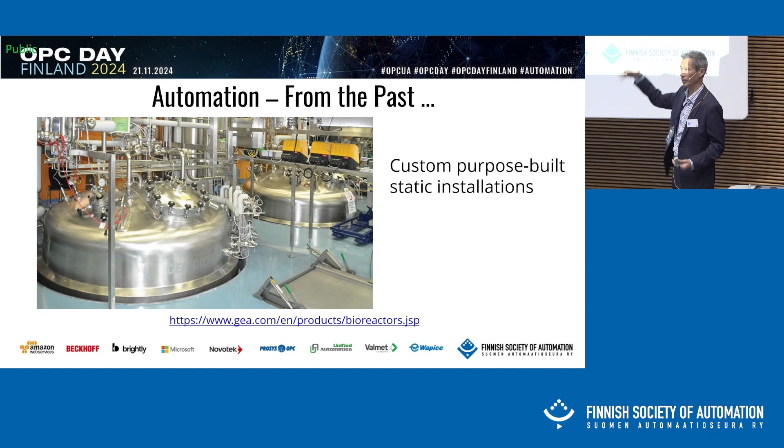So where I left off, we talked about the pharmaceutical manufacturing from 25 years ago, and you can see examples of very big stainless steel tanks. And this was the age of the pill, a pill for every person on the planet. So very big volumes, stainless steel tanks, one plant, one product. And so that's what it looked like.

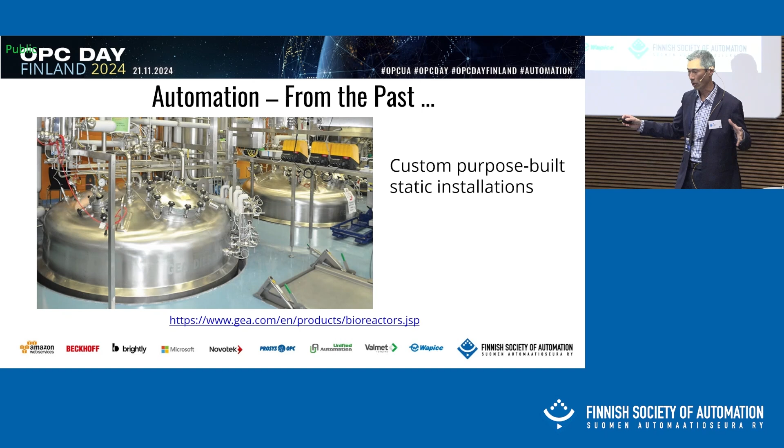But as I spoke about before lunch, the changing nature of the medicines, moving towards smaller patient populations, smaller batches, eventually, single personalized medicine, one medicine tailored to the individual. So the whole trend in the industry is much smaller batches. So our new plants look more like this. Single unit operations, so each piece of equipment performs an operation like a bioreactor, like filtration, like viral inactivation, chromatography. You can get these skids, you could have them in place with feet, but when they arrive, they typically come with wheels. And so they're also mobile modular units that stitched together can do the manufacturing production, much smaller facility.

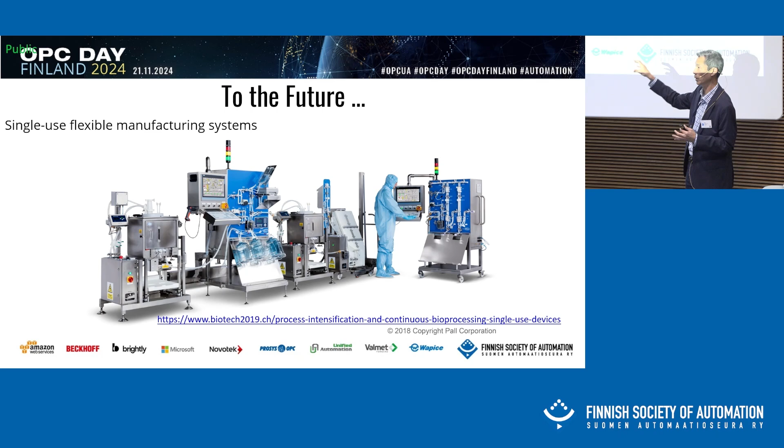You'll see the people are gowned. So if you have special requirements around making sure you have a clean environment, you want to minimize the space that you're treating with clean air and trying to keep particles out. And so the trend also is much smaller facilities with smaller equipment, and again, tailored towards a smaller patient population than in the past.

So what are the advantages of modular plant design? It's driven by business considerations that we're trying to transform. And I have a quote from our Vice President of Engineering, who has declared that all our future plants that we build, we want to spend 40% less capital, and we want 80% of all the engineering design work done off-site, preferably before we even decide to build the plants. So again, it's forcing us to use equipment that can be bought off the shelf, pre-manufactured by an equipment manufacturer. You'll hear names like Sartorius and Merck Millipore and Cytiva.

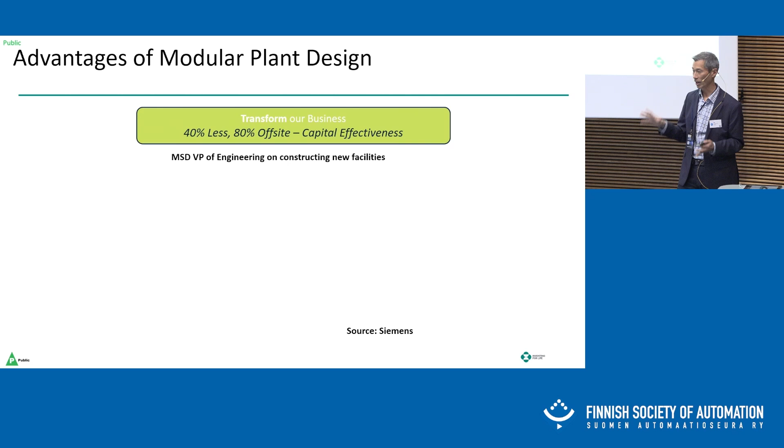These are the companies that supply those types of equipment that I showed in the previous slide. And you can buy them off the shelf, pre-engineered. And the advantage of the modular plant design, a friend from Siemens provided this slide, is as opposed to the traditional process plant engineering of decades ago, where you made an investment decision, okay, we're going to build this plant, and then we're going to custom design all the equipment, and we're going to get an engineering contractor and build up this equipment.

That takes a lot longer time than in this new world of module engineering, where we buy modules and integrate the modules. And 80% of the work is done off-site, and much of it is embedded before you even start the project. Our equipment suppliers have already done the work of module engineering, whereas in the past we would custom design many of our own pieces of equipment. But ultimately, it results in a huge time savings for your plant to get online.

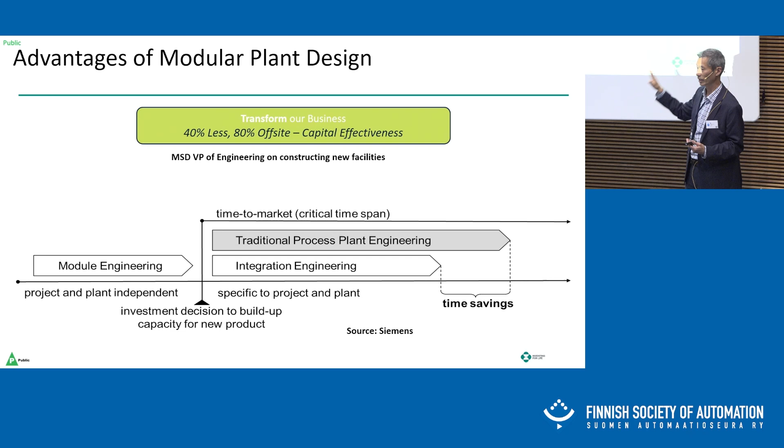And also, in a very competitive, globalized world, our company will have new medicines, but typically several other companies have a very similar molecule or a very similar medicine, and whoever gets to market first gets the lion's share of the revenue of the product. So this new way of designing plants to drive time savings forces us to move away from traditional plant design into this modular plant design.

And the advantages, I've talked about some, but it allows flexibility. You saw the equipment can come on wheels, and we can reconfigure and restack equipment depending on the product we want to make. We save a lot of money in the construction because it's a compact, prefabricated design. And the modular equipment, this is important, can be reused for new products when assembled as a platform. And I have a platform slide later.

Whereas those stainless steel tanks I showed before, that's a fixed plant that can only be used really for one, maybe two products. The whole idea of modular plant design, the time savings, the pre-engineered work to get to market faster. And also, this modular design scales very well with new product introductions. So not all our products meet our marketing projections. Sometimes our marketers think we're going to sell this much, but initially we might only sell small amounts.

We can then copy those plants and build another set of modules just like that and scale up with market demand so you don't overinvest capacity too early in the process, or in some cases where the market demand never materializes and you're stuck with a plant that you spent all this money on but maybe only operating at 15%. So all the reasons for modular plant design.

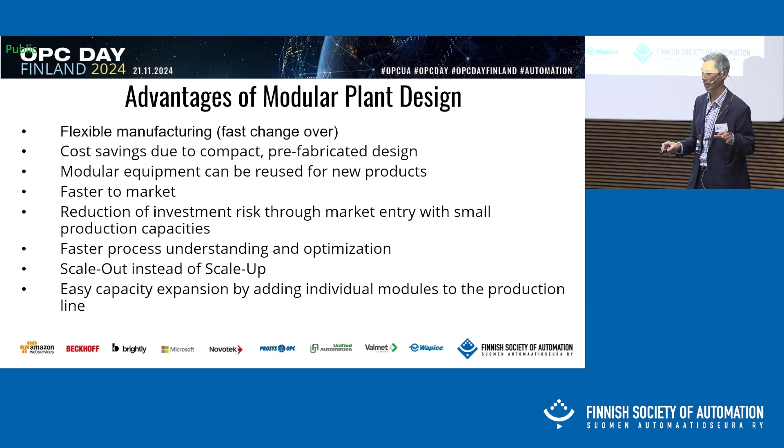I'll quickly move through. So yeah, problem statement. We want to design flexible facilities, but with flexible facilities, it's okay if the process and equipment in the picture are flexible, but the automation needs to match that same flexibility in designing a facility of the future. So we designed platforms for manufacturing based on these pieces of equipment, and you see examples of bioreactors, virus inactivation skids, chromatography skids. They can be swapped in and out depending on the product we're making.

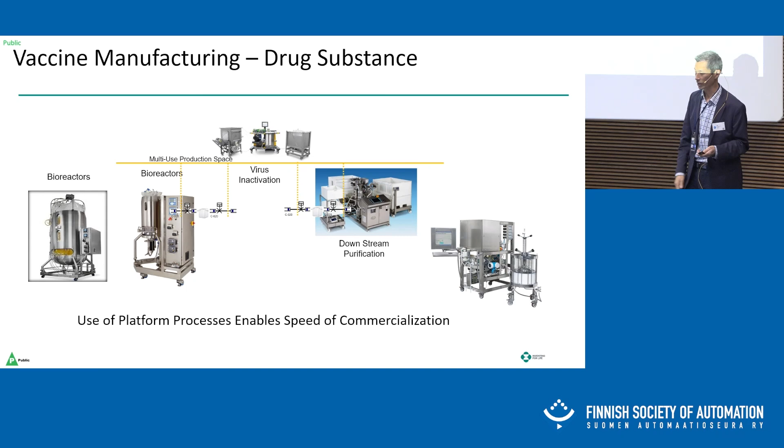Sometimes vendor A provides us with the downstream purification skid. For another product, we might just want to substitute in vendor B, but we still preserve the rest of the line. So in this way, we build one platform facility, but it can accommodate many products so long as we're able to swap in unit operations depending on the product we're trying to make. And that's the idea of the platform manufacturing. And we've proven out the idea that this works during the COVID pandemic.

So during those terrible years, 2020, 2021, we developed 4 different candidate vaccines for the coronavirus, and 1 biologic that was used to treat those who were infected with COVID. And in 1 calendar year, we were able to run all these different products in a single facility, and using the platform line, 80 to 90% of the equipment could be used in place, but we'd just swap out certain pieces depending on the medicine we wanted to make. Ultimately, none of these medicines panned out; they were not as effective as the messenger RNA vaccines that otherwise came out.

But for our company, it proved the idea that flexible manufacturing, using a platform, the ability to swap in and out equipment was going to be an idea that would be the entire future of how we build out plants. What this demonstration did show also, though, we did not have the ability to have a modular plug and play with the data, the automation, and the control.

So the equipment was being swapped in and out, but we still have isolated islands of PLCs. Each of those unit operations comes with its own intelligent controller designed by the equipment vendor, and they pour a lot of money and time and debug the code, so it works just like they intend. But it's the interoperability we needed with a supervisory layer.

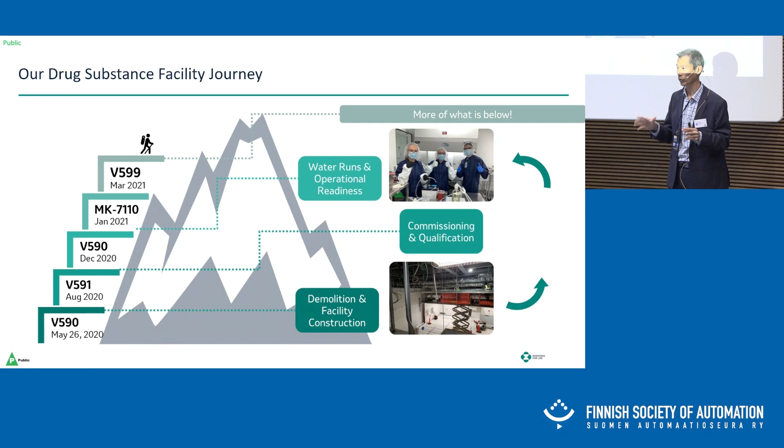In the MTP terminology, it's the POL, or process orchestration layer, that governs all the plants and runs all the individual pieces of equipment. So modular plant design led us to the need for modular automation, and we found a really good solution through this emerging standard, the module type package, which this year Profinet International is going to take on and be a sponsor for that standard.

So the principles of plug and play for automation equipment, PLCs, controllers, relies on the fact that you have a supervisory control system. And in the pharmaceutical industry, we use Emerson DeltaV as a very popular system used as supervisory control, but ABB, Siemens, they all offer very similar systems.

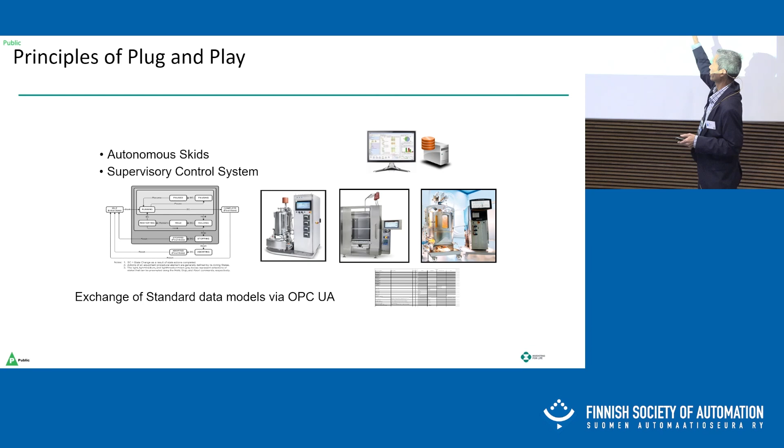And we want to use that system to talk to and control these unit operations that are being swapped in and out. And the way we do that is to talk to them via standardized data models, typically embedded in a modeling language or described as in standards like MTP, but also transmitted over OPC UA on top of Ethernet.

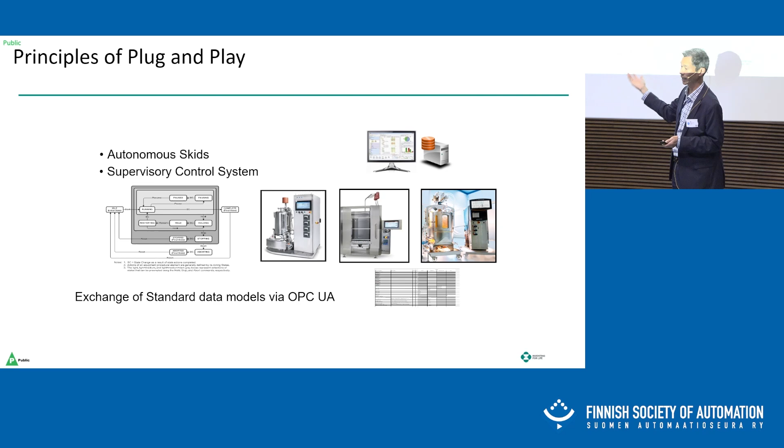And I'll just give kind of a brief history of the module type package standard. It's a vendor neutral modeling description, and it allows an exchange of data between a supervisory control system layer, termed the POL, process orchestration layer, talking down to a process equipment assembly layer, PEA. So those unit operations, the bioreactors, the filtration skids, those represent the process equipment assembly layer.

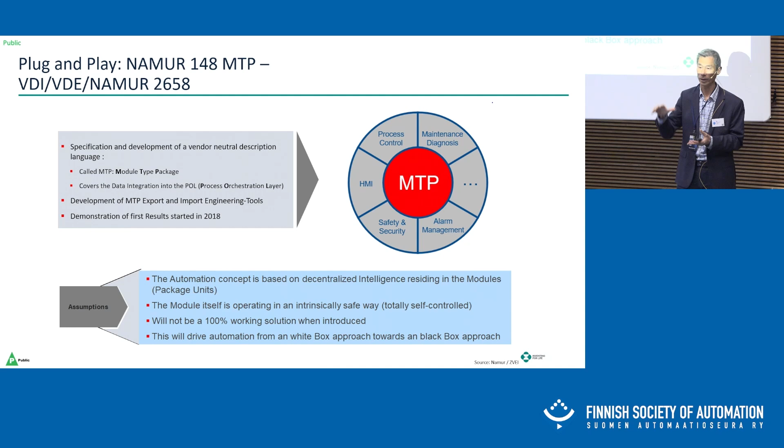And it allows an exchange of information, including an ISA 88 state machine model, very important, as well as a provisioning of services expressed as software as part of the equipment that can be called upon by the supervisory POL layer.

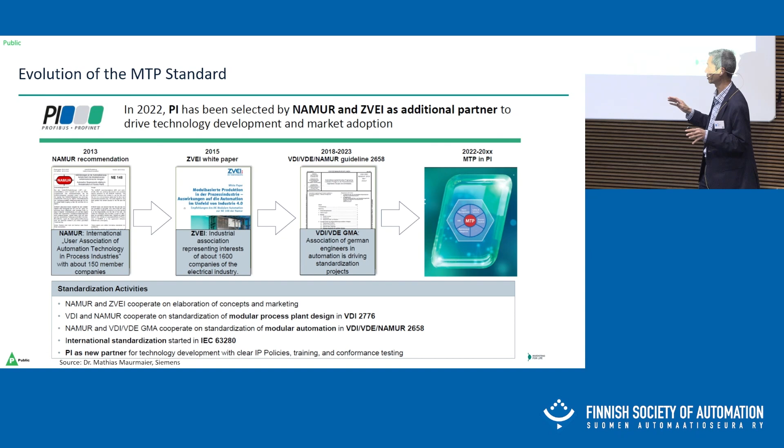Just running through a brief history, NAMUR came up with the recommendation for this idea of the module type package standard back in 2013, evolved into another association, ZVEI, developing a white paper. And then the guidance was further refined until they approached the Profinet International Standards Body to sponsor this module type package standard. They're pursuing an IEC number 63280.

And I got the slide from Mathias Maurmaier from Siemens, and just following the LinkedIn threads, Profinet International, very soon there will be this release, this MTP 2.0, and Yoni has some information, after this talk, on how folks can sign up for a webinar on the introduction of the MTP 2.0. So approaching an international standard, and the release of MTP 2.0 is imminent.

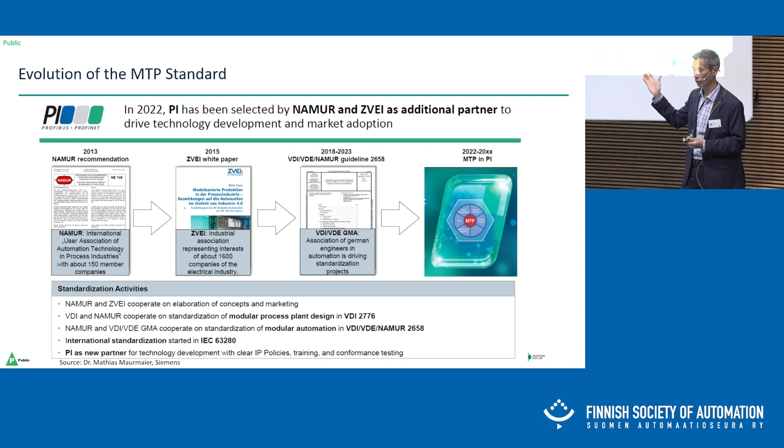Okay, so one of the really great features of the module type package is the establishment of an ISA 88 compliant state machine. So a POL can run machines in the PEA layer like a state machine. Very important in production of all types of things beyond just pharmaceuticals.

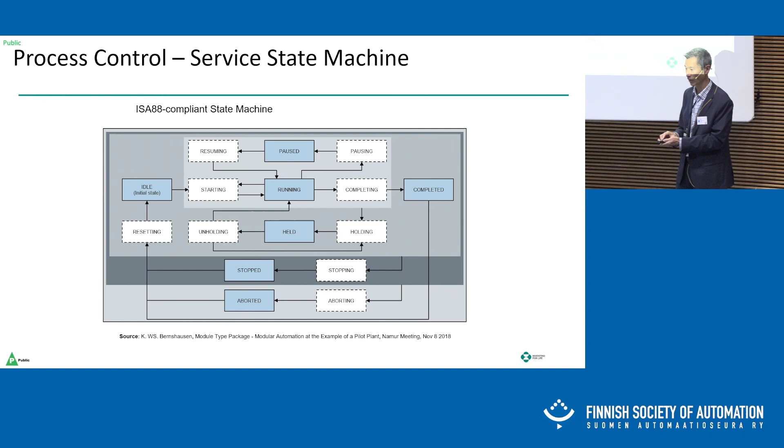And then MTP has a set of guidelines, rules for developing software services aligned with each of those ISA 88 procedural control models. And this allows, I'll take an example of a bioreactor. The bioreactor has a number of services that can be run on it. You can inflate a single-use bag, you can agitate the contents, you can feed material in there.

Through the MTP, we abstract out those physical actions into software actions. Okay, so now consider it kind of like equipment as a service, abstracted with these software services to be called by the process orchestration layer. It simplifies the logic between supervisory POL and PEA equipment, such that at the POL level, we can just call

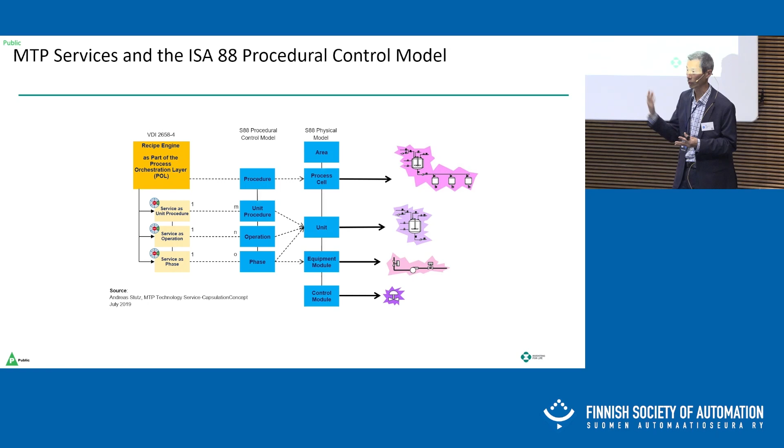for services. I want to inflate a bag. I want to agitate. Just very simple service calls now, as opposed to the complex spaghetti logic of the past before we had MTP coordinating control between POL and PEA layer. So the example we use, I have an emerging use case from my company, and we're just starting to build out these MTP boxes, but it's associated with, again, a bioreactor and some ancillary equipment that goes with the bioreactor to supercharge the yields we have.

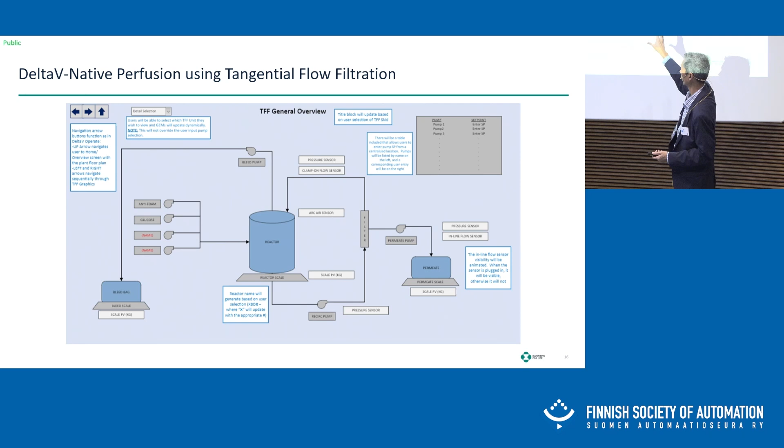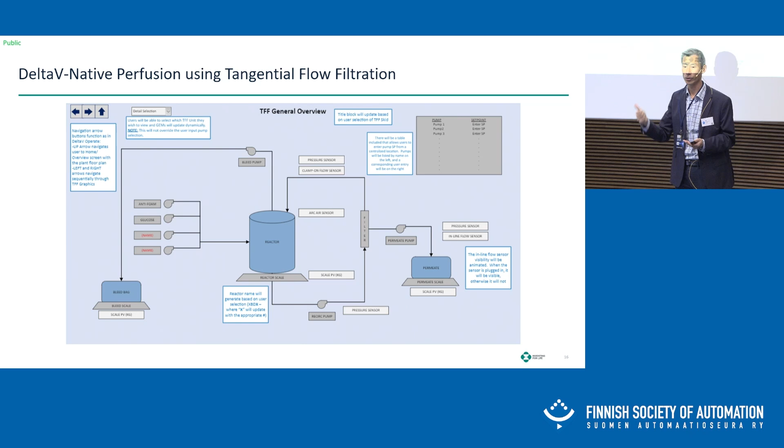So typically in a bioreactor, we will grow cells. The cells will host some kind of therapeutic protein or a monoclonal antibody to treat all kinds of conditions. And we just want to grow lots and lots of cells in this compact manufacturing facility. And so we have ancillary equipment to help with the boost in productivity. We have pumps, we have scales that typically talk RS-232, 485, Ethernet IP, Modbus TCP, the whole alphabet soup of protocols. And then we have more standard traditional I/O that is 4 to 20 milliamp or digital. And so represented by flow sensors, represented by pressure or temperature.

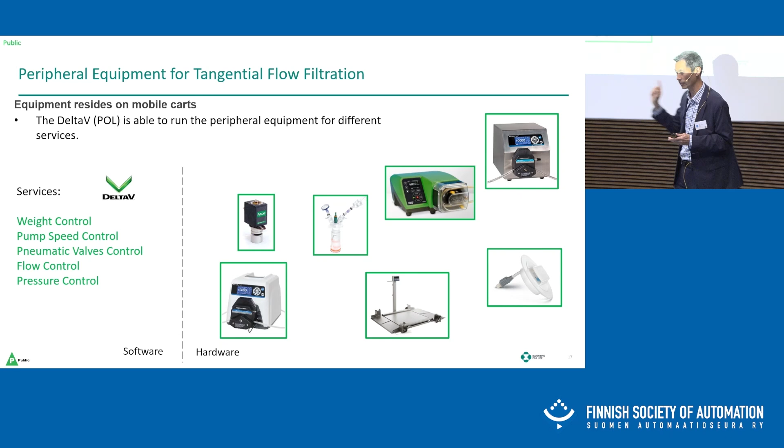And this peripheral equipment shown here needs to be attached to and communicate to the POL, which is represented by DeltaV. And the DeltaV will have the ability to call services, common functions that are used, provided by signals by these pieces of equipment. So things like weight control, flow control, pressure control. And the way we want to communicate is rather than individual wires from each of these systems into a DeltaV, but rather create a sub-PEA layer of equipment ganged together that just communicates via one wire to the POL, shown here in this diagram.

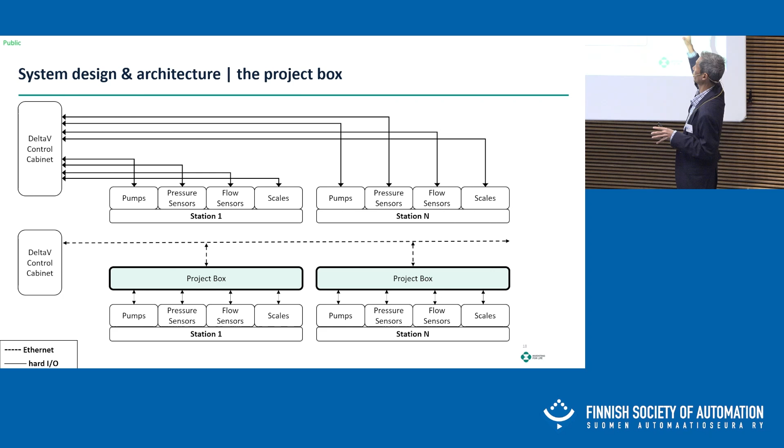So the traditional way of tying in all that I/O, you see the sensors and the pumps and the scales, is to run all these wires back to a single I/O cabinet. Now remember, we talked about very small, compact spaces. And this is where we see a big advantage for MTP running a single Ethernet wire as opposed to all the different wires from the sensor, and then combining all these pieces of equipment into a single process equipment assembly that then talks to the DeltaV control system with MTP, OPC UA providing the tag mapping, and then DeltaV then being able to communicate and call out services via the MTP protocol, things like the weight control, the flow control, the pressure control.

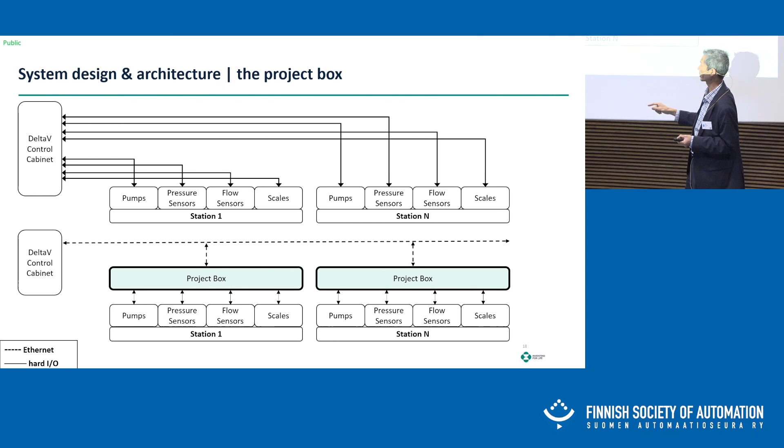And that brings us to the end of the talk. Again, what I've hoped to try to communicate, I start with a business problem, the personalized medicine, the need for a single plant to produce many, many different medicines, leading us to a modular plant design with modular equipment that we swap in and out. But if you need to swap in and out of the equipment, what happens to the data, the automation control? Well, this is where the MTP comes in to allow us that same plug and play ability similar with the equipment. Now the control and the automation flows with it.

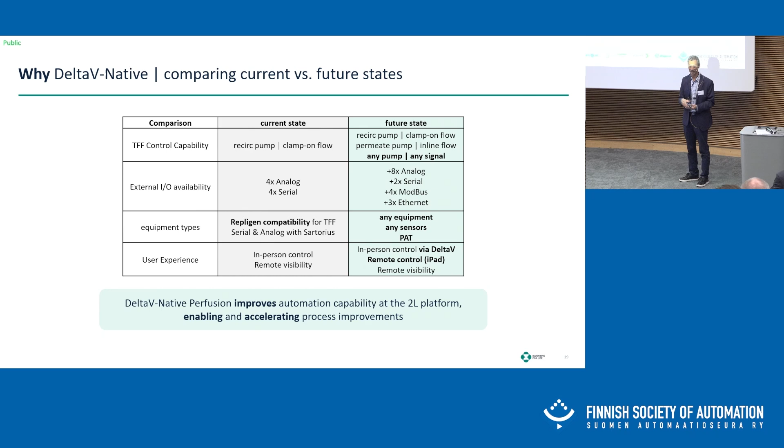And that brings us to OPC and MTP, which, MTP is an emerging standard built on other established standards like Ethernet, OPC UA, ISA 88. And this entire stack allows us now to do this modular plug and play automation for our industry.